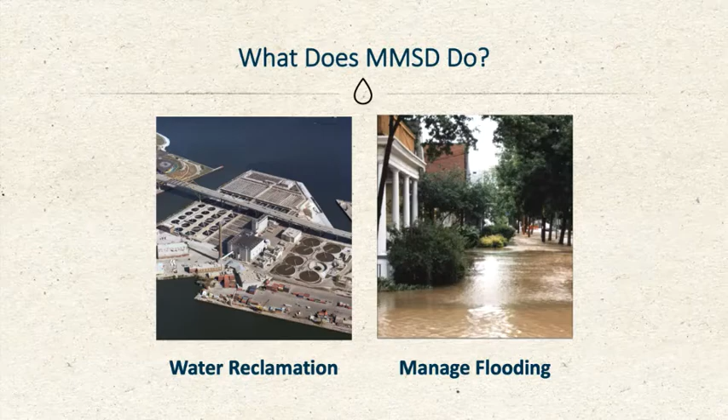The customers that we serve, over 1 million in the city of Milwaukee, as well as the surrounding community, 28 municipalities in total, and our planning area is about 500 square miles. And that includes 6 different watersheds.

All of those are not tributary to the Mississippi, so we are just a bit outside of this Mississippi River water basin. If you go about 20-30 miles to the west of us, you will actually get into the Waukesha area, and our flow starts to go down into the Fox and into the Rock River, out towards the Mississippi. But all of our water right here in Milwaukee drains directly into Lake Michigan, into the Great Lakes basin.

This is primarily through 3 main waterways that come through downtown Milwaukee. Again, this is the primary reason that Milwaukee is here, why the Native Americans settled in this area, and why the European settlers came in and

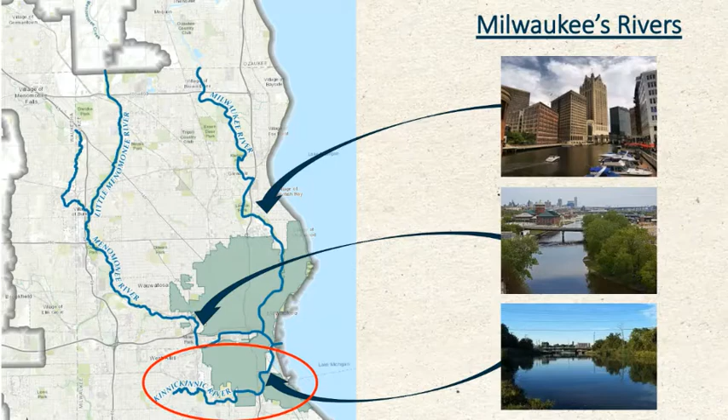And it is the most urbanized watershed. This is the Kinnickinnic River watershed, on the city south side. The top of the slide is the downtown area. It extends all the way down to the General Mitchell International Airport. It's only about 27 square miles, so it's relatively small, but also very urbanized. It's the most urbanized stream in the state of Wisconsin.

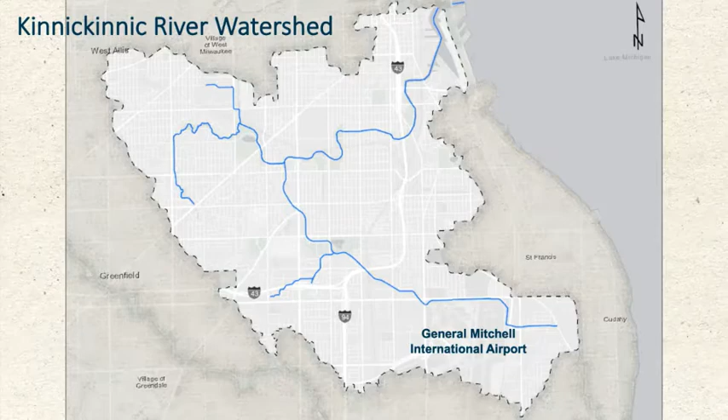Almost half of the surfaces within the watershed are impervious surfaces, which means parking lots, rooftops, sidewalks, streets, all those hard surfaces that don't allow water to soak into the ground. What this all translates into is rain running straight off of those surfaces and overwhelming our rivers and streams, which has led to a high flood risk throughout the waterways in this watershed. We've been working on this, but we still have over 660 structures, residential, commercial, industrial, located within this 100-year floodplain, within this high-risk floodplain.

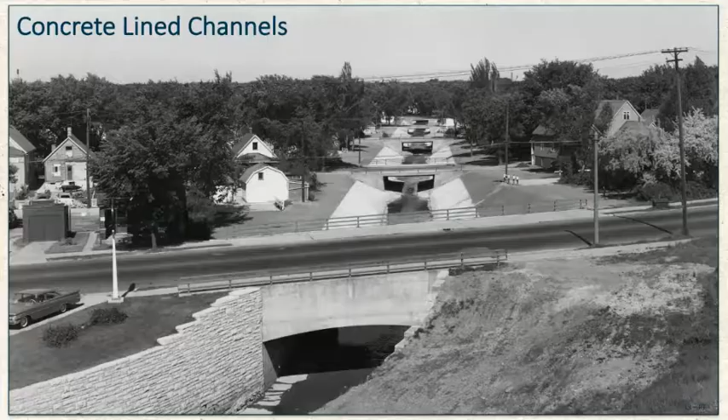In addition to this high flood risk, we have miles and miles of concrete lined stream. We have over 7 miles of this concrete lining throughout the watershed, throughout the Kinnickinnic River and its tributaries. And lots of people ask me, why do you have these open sewer drainage ditches that run through your communities here?

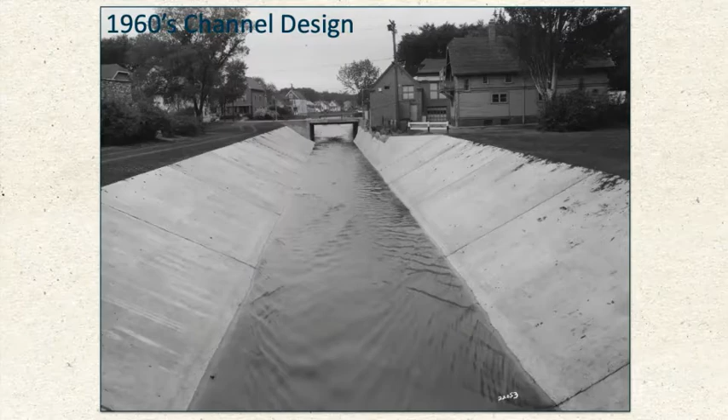How did you get to the point where you had these streams that were designed with the CCC and the WPA, still putting in some armoring, but having a natural stream design, and then converted it to this, which was the approach back in the day, used by flood managers back in the day.

It was all to address this historic flooding on the Kinnickinnic River, where you had development that occurred within the watershed, kept spreading out until it essentially was fully developed, and all these impervious surfaces led to significant downstream flooding in these areas. This is the old Polish neighborhood at the downstream end, at the bottom of the funnel, on the Kinnickinnic River.

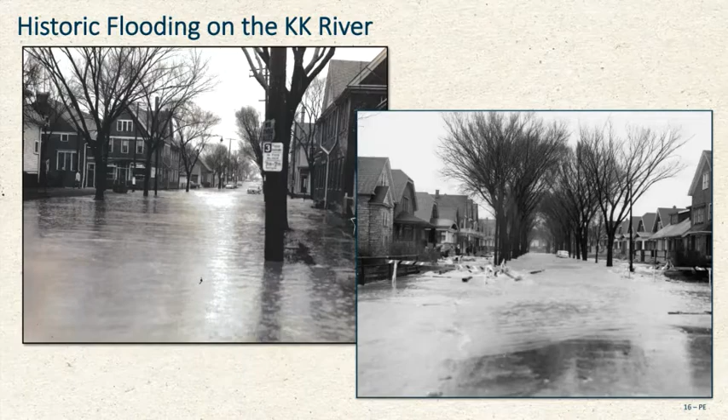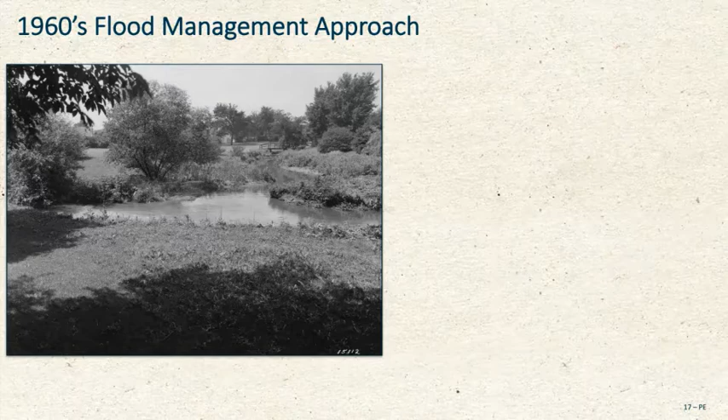And the way that they addressed that was to take these vegetated streams that were filled with all sorts of roughness and curvature, and they would straighten them out and line them with concrete. They would smooth out these channels, and really, this was the sewer engineer's design back in the day.

This was common back in the day, trying to push the water, move the water as quickly through these areas as possible. And it's good to keep in mind that this is also the time of the freeways, when the freeways were built, and this is all the same mindset, the same approach, just to try and move these things through these areas as quickly as possible, focusing on that single objective.

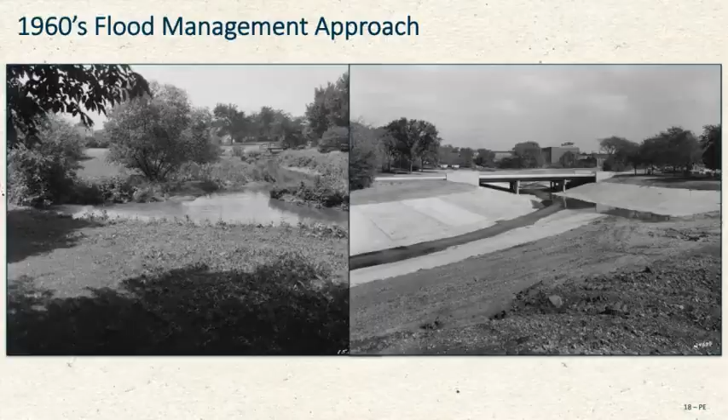They saw this as a big improvement. This was a major hurdle, and it probably solved some issues back in the day. But they all saw this as moving things forward, so they had big celebrations to celebrate all of this improvement throughout the area.

But we're left with this legacy, and we are now 50, 60 years after it's all been installed. We're seeing all sorts of problems from this. The whole intent of building these concrete lined channels was to move water as fast as possible.

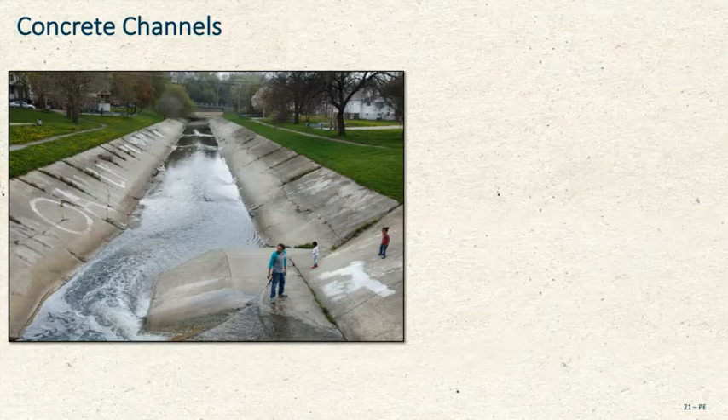These rivers and concrete lined channels run throughout the watershed, right through residential areas, right behind people's backyards, through neighborhoods where kids play and people come to see what's going on at the river. Right where this father is taking his two little girls down to check out the stream, this is what it looks like on a flooding day.

The river will fly through this area, doing exactly what it's designed to do, moving water up to 20 feet per second through this area. As a result, we've had several deaths over the years because when people slip into this area, they're not getting out.

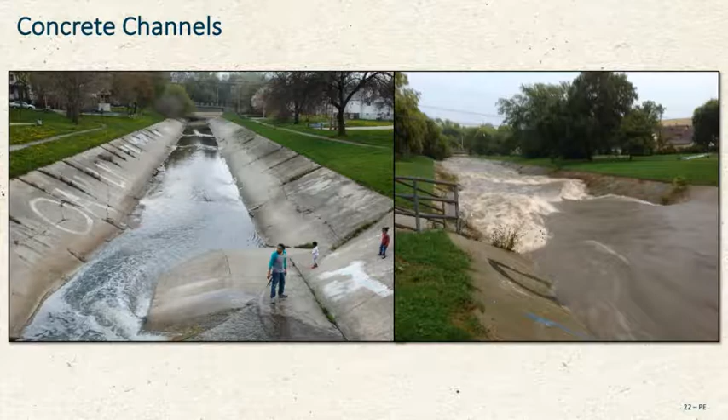So we had this severe public hazard running right through these neighborhoods. The obvious issue is that it's not a stream anymore, it's not a river, it's a concrete ditch. So you have issues with removing all the benefits, the habitat, and the water quality.

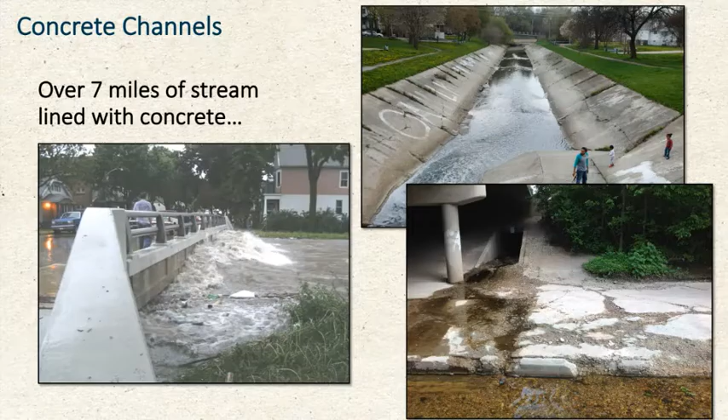So we are moving forward, addressing this flood risk issue along with all of this legacy concrete. MMSD, working with several area partners, tackled this watershed planning effort a few years back, trying to look at this holistically rather than just the sole objective of pushing water through these areas as quickly as possible.

We're trying not only to reduce the flood risk, but also to slow down these flows, improve the riparian and aquatic habitat, and restore some natural function back to these stream corridors so they look like streams again. This way the public can understand the connection between these streams and natural habitat, that they convey directly to Lake Michigan, and that they should do things to improve conditions around these stream areas.

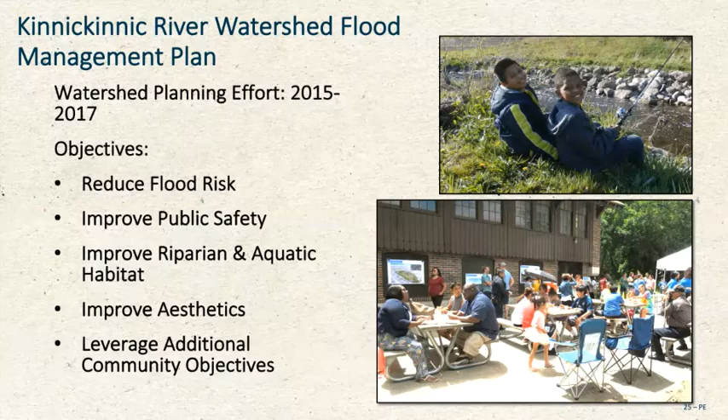So we tackled this watershed planning, and we did it using the standard toolkit that all flood managers are well aware of. We tried to break it down into more common language for the public, using terms like push it, slow it, and block it, instead of talking about increasing conveyance capacity, trying to simplify the message. But really, that's what we're talking about, increasing the opening so that water does not back up into these neighborhoods.

We understood that push it was overused in the past with these concrete lined streams, so we coupled that with slow it down too, by expanding these floodplain corridors. Blocking it, these levees and flood walls, that's everything you guys are well familiar with in the Mississippi area.

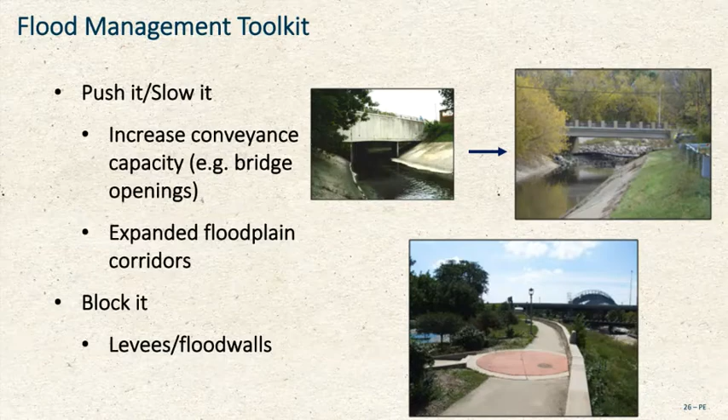Next slide. We also looked at storing the water through not only large scale detention basins, but also, because we're working within a small flashy watershed, what are the benefits of green infrastructure within this area? So smaller scale storage opportunities.

And then, when we're not able to lower the flood stages enough, when we're not able to bring that flood risk down, we look at working directly on these homes, either buying, acquiring, and removing them, or floodproofing them. In the Wisconsin area, according to the codes, that generally requires raising those homes and filling around them for residential. So it's a significant effort, one that's probably going to be pretty challenging in these dense urban areas in the Kinnickinnic River.

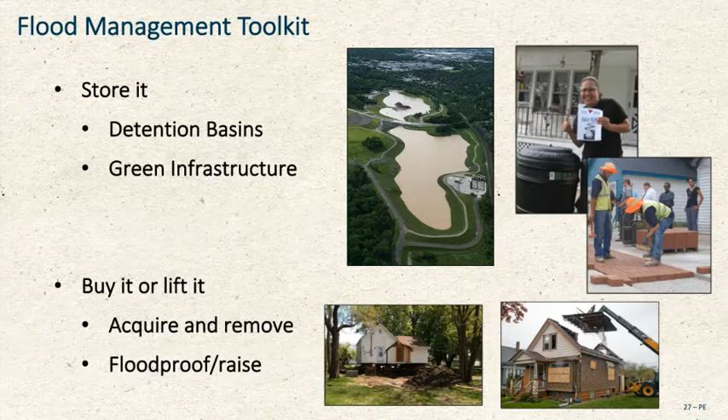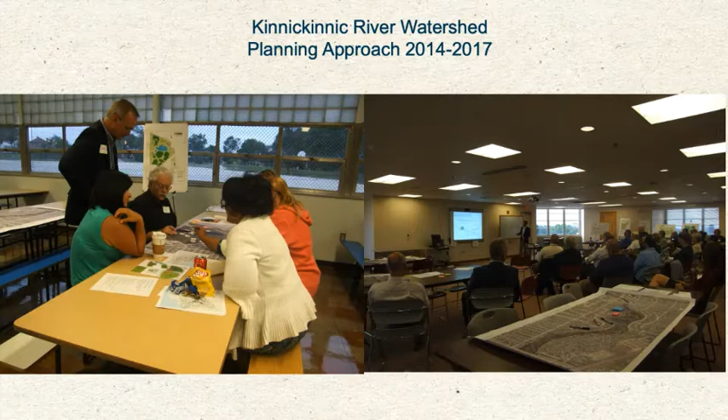In addition, we also worked with a lot of stakeholders in the watershed, including other organizations, agencies, and partners. A watershed advisory committee was established for the watershed far in advance of this specific project, focusing on anything happening with the KK River watershed. All of those meetings were absolutely critical as well, because there was a lot of knowledge there and a lot of projects and implementation happening.

So a lot of opportunities for coordination, no doubt. Here's just a quick snapshot, probably not perfectly exhaustive, of who is at the table at that level. All of that feedback and involvement from all these layers of community members and stakeholders resulted in a really rewarding process of planning the watershed.

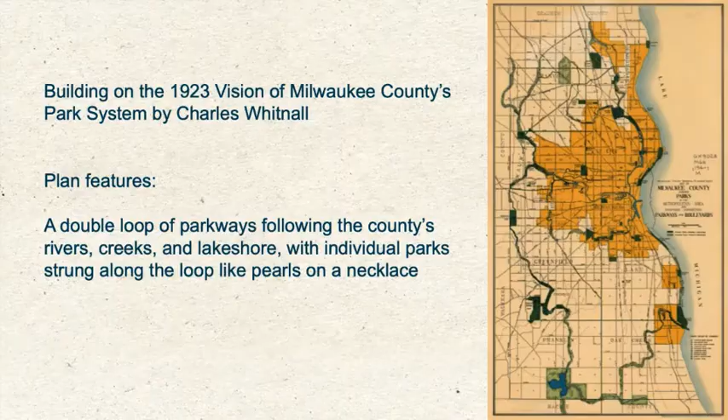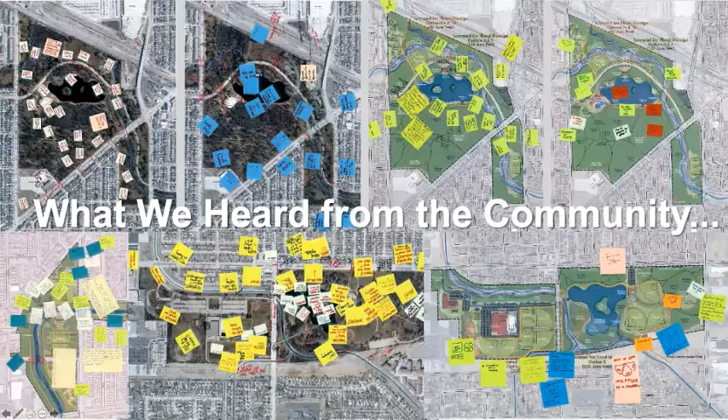Working with the community, we spent a lot of time listening from the beginning, looking at aerials and photos, and working with the community about what they'd like to see and retain. And of course getting to a level where we began to put together conceptual plans for that larger vision so the community could continue planning and continue that dialogue moving forward.

These are some examples of what we heard from the community. First and foremost was to make the KK River a community asset - wherever possible, naturalize it, daylight it, dechannelize it. The community wanted to see opportunities in the parks, but also elsewhere, to embrace the river and interact with it. Given we were doing park planning simultaneously, that gave us an opportunity to look in a larger way at the parks too, with the Parks Department, about what to retain.

These old growth trees were of utmost importance, as was increasing safety and habitat. Community gathering spaces and upgrading older athletic fields were also priorities. There's an existing trail system in the watershed that the community is interested in seeing grow naturally along the river and throughout the park system.

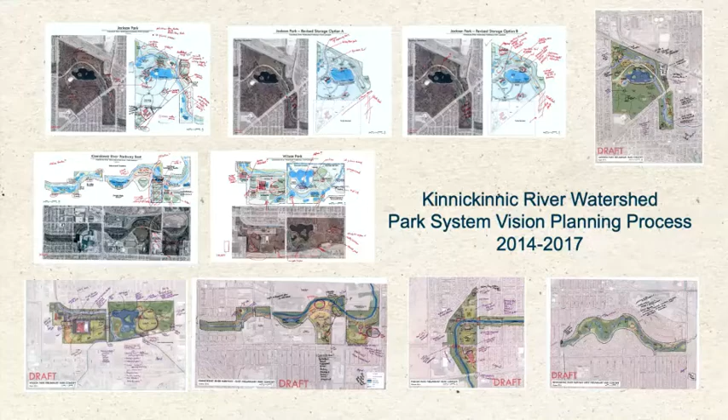There were alternatives for all of the parks, and the community had feedback there too. Milwaukee County Parks was at the table through and through, since ultimately these parks are their responsibility, and some of this feedback was going to be their financial responsibility as well. All of this culminated in these 5 master plans or concept plans, happening over a large span of time, 25 to 30 years or so.

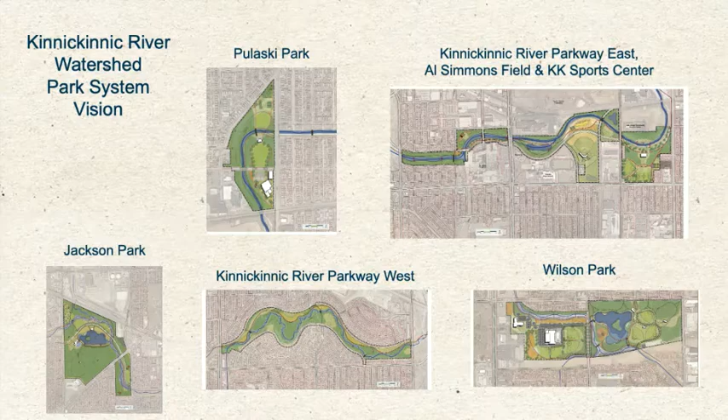So there's different phasing taking place. While some of these parks, like Wilson, aren't going to be updated anytime soon, it was critical for us to do in-depth planning now so we could better understand what's happening and what community members want, so that as planning continues, the community has already been engaged in that envisioning. Others, like Pulaski Park, are happening short term, and what you'll see shortly is it's now been built, which is exciting and has been critical in setting the tone for the watershed.

That's really an area where the community is incredibly active through this entire process. It's the densest area of the watershed, the most diverse, and in terms of environmental health and demographics, socioeconomically more disadvantaged than most other areas in the watershed. So it was of utmost importance to ensure this community is engaged and gets a park that is worthy of them.

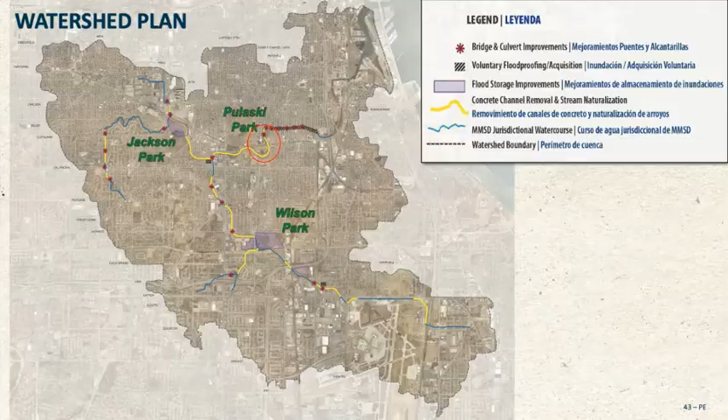For Pulaski, we did engagement a little differently, since it's a smaller scale area that's highly engaged and organized, already regularly meeting for community meetings and celebrations. This is a community that cares about one another and knows one another. 16th Street Community Health Centers and KK River Neighbors in Action would regularly plan events that we could plug our engagement into, rather than scheduling a special meeting. We could go with what made sense for them as well as the project.

This was really for the final design, picking out all the design details, the playground equipment, the pedestrian bridge. Working with county parks solidified what would work or not work for maintenance reasons, but there were still a lot of choices for the community to select those features for their own park.

Also really cool were activities like fishing demonstrations, even though there weren't fish in the KK yet. Kids fishing in a concrete channel is a little sad, but just for the kids to understand and learn that someday there will be fish in the KK River again was really cool and exciting.

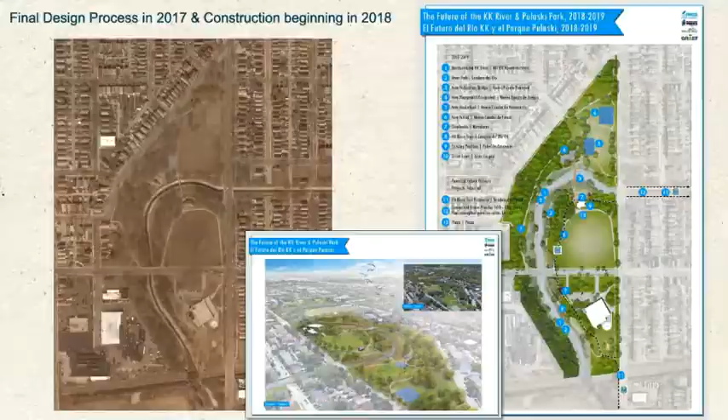Because the park, not the entirety but a good part of it, was going to be out of commission for a couple years during construction, it was of utmost importance for people to really see what was coming, and to know that even though they were losing their park for a couple years, all their hard work, feedback, and dedication was going to result in this really exciting project.

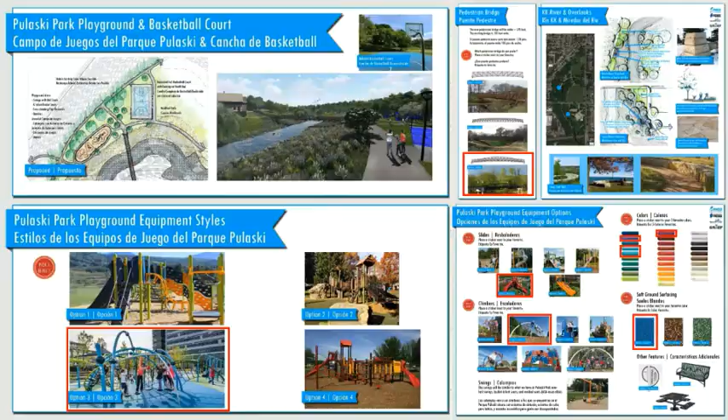We were really passionate about communicating that back to community members when they came to meetings, so they could understand why choices were made and what they picked, and how many people voted for what. I think that was really helpful to set the tone and make sure this project is catalytic for all the forthcoming projects in the watershed.

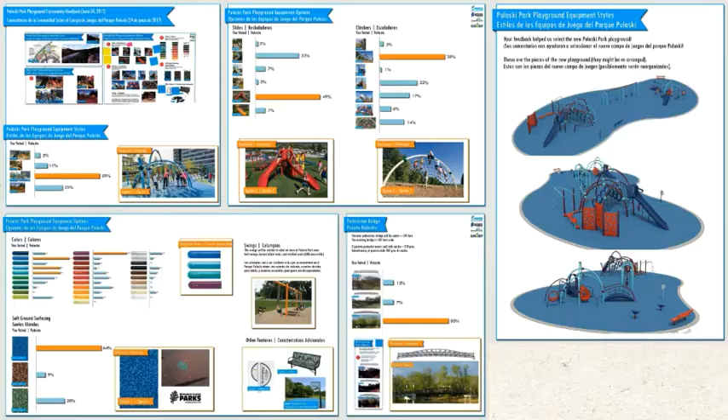With that, I'm going to turn it back to Patrick to share the story of the construction process. I just have a few more slides to go through. This is Pulaski Park, this is that broken concrete before we started in April of 2018.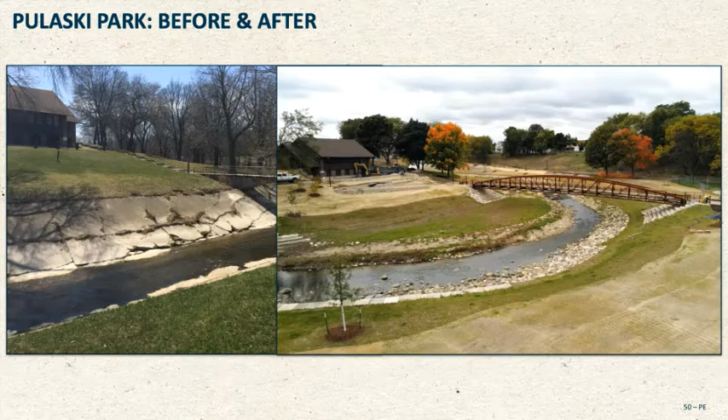As Tanya said, the design of that pedestrian bridge - you get to where you have 3 or 4 choices that the county, MMSD and others don't really care about, and you just say, let the community decide. So they got to choose that bridge, and that's their bridge, and they'll take care of it now. It's a great story, and you can definitely feel and hear the appreciation from the community.

Here's the concrete from the other side of that bridge, showing that concrete lining, and then removing that. Next slide.

That restored channel through this section. Again, this is right after construction, so the vegetation is still getting ready to grow, but we put in that rock-lined channel and have that vegetated floodplain to allow the floodwaters to expand in this area, with much slower flows passing through here during high flows.

We've already had a few high flows pass through, and they're definitely a lot slower within this section, much safer for active park users in this area. Next slide.

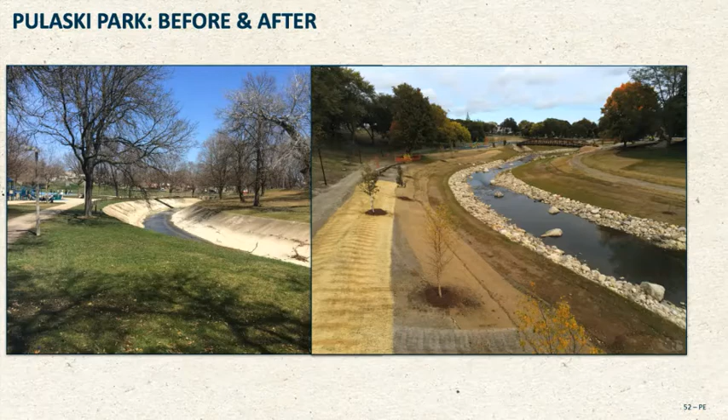These are some more updated photos. The other slides were more from last year, and we finished construction this past August. Some of these other areas that we completed a year ago have had a chance to start establishing - the vegetation's had a chance to start establishing and it's getting more use. The new playgrounds and new basketball courts that we had to shift outside of the alignment of the river are definitely active. Next slide.

You see the community use in this area - there's lots of smiles, and that's one of the most rewarding things. I don't live far from here, so I'm able to come pretty regularly and check on things, make sure everything's holding up the way it's supposed to. It's great to see the smiles on people's faces and how much they enjoy this park space, not only the active spaces, but also being able to get down to the river and enjoy the naturalized stream within this section.

It's really something that kids and the public don't have in this section of town. Bringing back nature within this highly dense urbanized area is so important to create that connection with the community. Next slide.

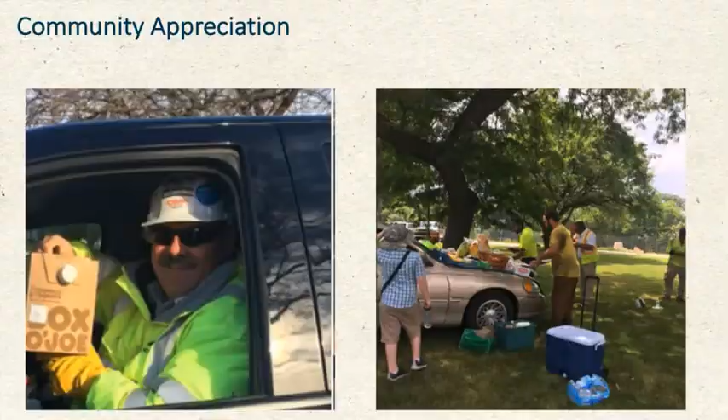So what's next? Just a couple slides here. We're focusing in on the watershed plan, focusing on the Kinnickinnic River. We've talked about Pulaski Park, and we're going to continue working in this area. Next slide.

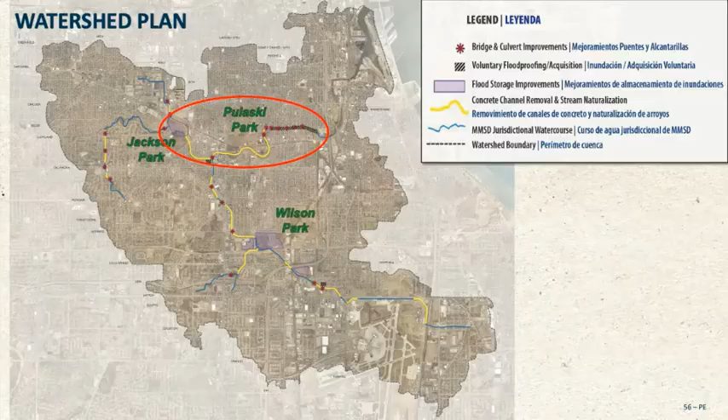And this is the flood risk within that section, from 6th Street all the way to 43rd Street. The river flows from left to right, and at the end that's the bottom of the funnel. It can't get through that area and spills out into the neighborhood. We have over 300 structures, homes and businesses, located in the floodplain along this section of the Kinnickinnic River.

We have a number of projects here. We've completed Pulaski Park, and we're going to be working on a larger park, Jackson Park, just starting preliminary engineering and design. That's probably going to be up to 3 times larger than Pulaski Park. We also have a section we call Reach 3 that we're working on with the Army Corps of Engineers. A feasibility study has been completed, and they've determined federal interest.

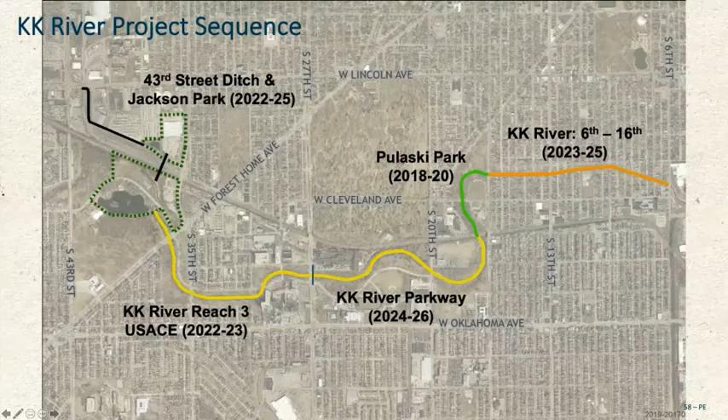So we're hoping to partner with them soon and start design and construction of that piece. But the last project I want to touch on is this section, 6th to 16th. This is the area with the greatest impact of flooding, where the flood risk spills out and inundates over 300 people. This area has been hit by flooding multiple times in the past 10 to 20 years, all due to not having enough room. This is the area that was first developed, and as the watershed was developed, the flood flows have overwhelmed it.

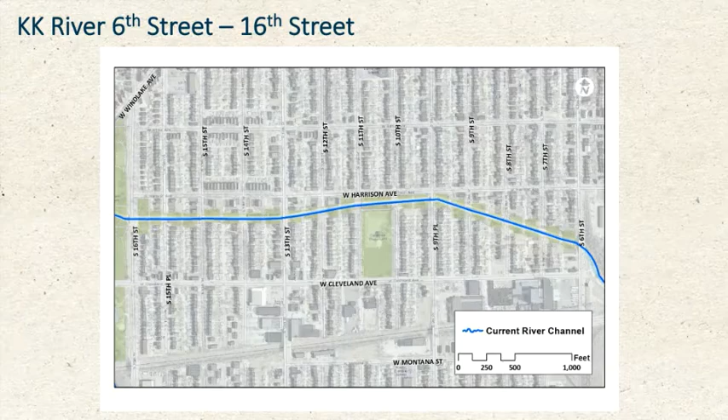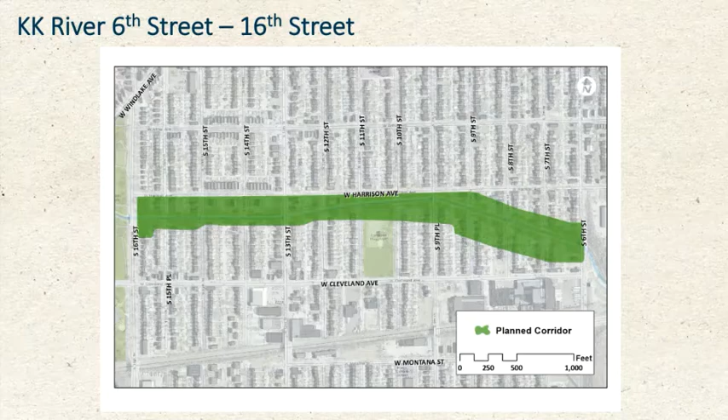So what we've determined is that even with all of this flood storage upstream, we have to expand this area. Right now we have a 50-foot concrete-lined cross section. We determined that we needed 200 feet in order to safely convey the flows through this area. And to get that space, we had to acquire a number of properties, including 83 homes.

We started this part of the project—we understood this recommendation a few years back before we even started the watershed work. We started that project back in 2009 and began the acquisitions. To date, we've acquired 79 of the 83 structures, all voluntary, and removed those structures. We have 4 structures left, there for a variety of reasons.

One is a landlord who just wants to stay as long as possible and make as much money as he can until he has to leave. A couple other people were underwater on their mortgage, so we're waiting until the absolute last date, and then we'll have to ask them to move, hopefully when they're in a better situation and able to keep them on their feet.

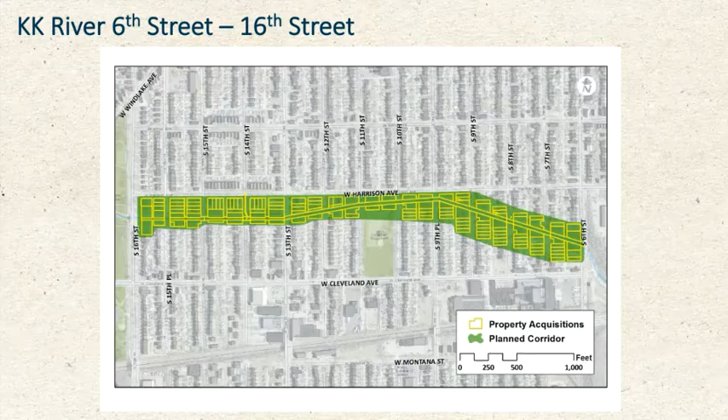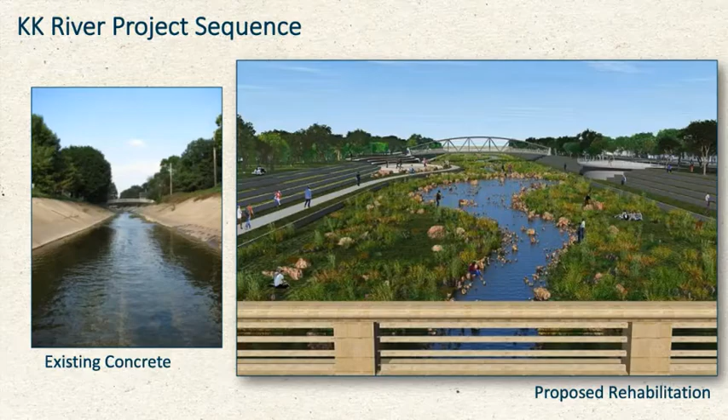In the next 5 years, we really hope to take off, investing another $100 million, where we'll reduce flood risk for over 250 structures in that floodplain—not physically removing those structures—and remove that concrete lining. By 2026, we're hoping to get it done before 2035. So the next 15 years, we want to have this project done, reduce flood risk to over 700 structures in total, and remove all of that legacy concrete lining. It'll come at a cost—it's a big price tag, and for the most part right now the investment is local, but we are looking for federal partners as we move forward.

So that, I think, is all we have. Hopefully you're still there, and the storms haven't blown you away—I hear there's some pretty nasty weather there.

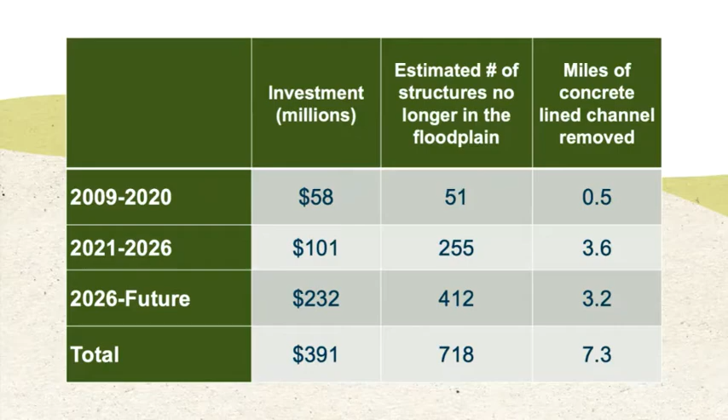Yeah, I mean, this project has had a couple of starts and stops. So we had one section of concrete that was only about 500 feet, and we also removed a bridge down at the far downstream end. That was back in 2010 through 2012. So we started this project. We understood that we had some significant issues, and it's complicated, but essentially we started the project, understood what we needed to do within this area, and we had that early out project that we were able to tackle.

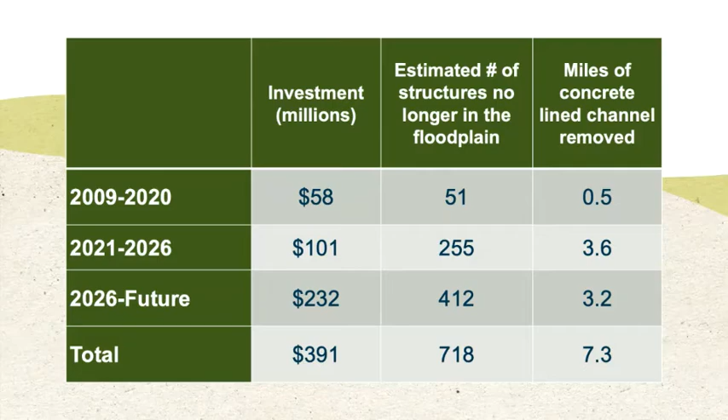But then as we're starting to move forward, working with the agencies, we realized that the floodplain flood flows that had been calculated had gone up to a certain period, up to 2004. And as we were moving forward with our project, we realized when you incorporate rainfall data from 2004 to even 2012, the flood flows started going up significantly. So we had to basically stop and restart, and went back to the watershed plan and really understood that we need to relook at this, because things have changed.

So it's something where we started the project with the buyouts. We knew we needed a wider corridor within that section, so we had started moving forward on that. We knew we needed a larger bridge, and we needed to remove the concrete at the downstream area. But then we had to take a step back and do the larger watershed project, and now we're ready to gear up again. And I guess just to touch on what...

It's a developed watershed, and so there's not a lot of room to build in a lot of freeboard. It's basically you got what you got, and we maxed that out pretty much as far as what's acceptable.

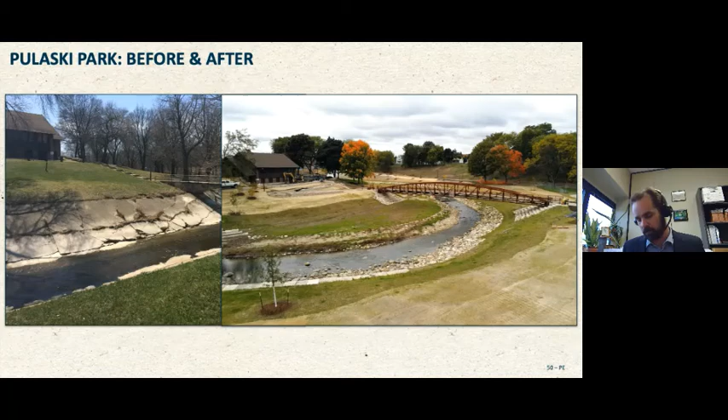I don't know if you could go to the map there, one of the maps real quick, Tanya, but in the far upper right-hand corner, that's where the downtown development occurred. And so if you kind of look at that, picture the development really occurring from that point and then spreading out through the watershed, just starting to go out to the far south and the far west.

And so over the years, that's how the development occurred. And so in that 6th to 16th section, where we're buying the homes near Pulaski Park, that's a section that developed in the 1880s and the 1890s. It was one of the earlier areas that developed.

And in 1910, we have some photos showing that they had some flooding back in the day, probably because my guess is that they had some of that marshy area, some of those wetlands that were upstream, were starting to get filled in with either farmlands or other things. And then even more so when they got paved over and turned into development.

But back in the day, in the 1910s, you had people that were built up very close to that stream, and there were complaints. There's documents showing that there was flooding back in the day.

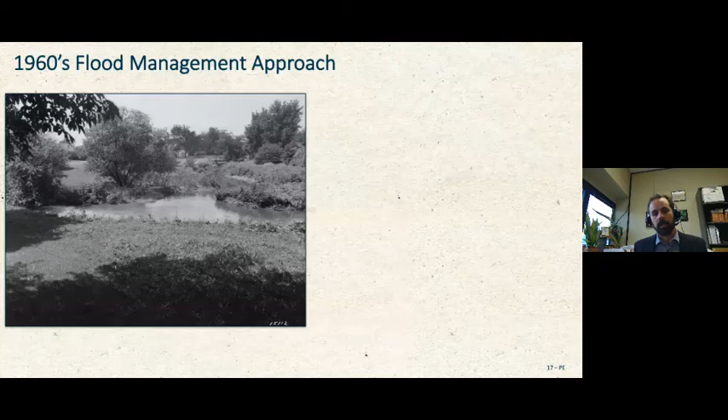That was something the CCC and the WPA, the Works Progress Administration, came in and put in that big rock to try and stabilize these areas, because they were starting to see erosion from these areas, the watershed changing. And so you had flooding that was taking place back in that day.

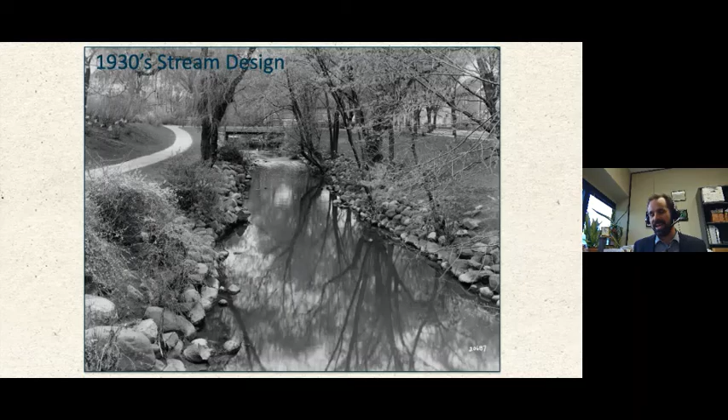You had talk in the late 30s, early 40s — they said, why don't we just put this stream underground? Why don't we just bury it and put it in a culvert? That had some legs, and fortunately it got thrown out.

But then after some significant flood events that hit in the late 50s in that community, in that area, that's when the concrete lining went in and was installed. And so you had the concrete that was put into place.

And we've had issues over the years with flooding, and the climate change that we're seeing in the intense rain events over the last 20 to 30 years is definitely ramping things up, so we are seeing higher flood events, more frequent flood events within this area. That's what our current statistics, our current calculations show.

We have pretty up-to-date data. It's still going to go up. We're not blind to that. We understand that, and we're trying to take measures that will address that. Our data in this area, I think it extends back from the 1940s. Our rainfall data used for modeling is from the 1940s through 2012, which is what we have within the modeling.

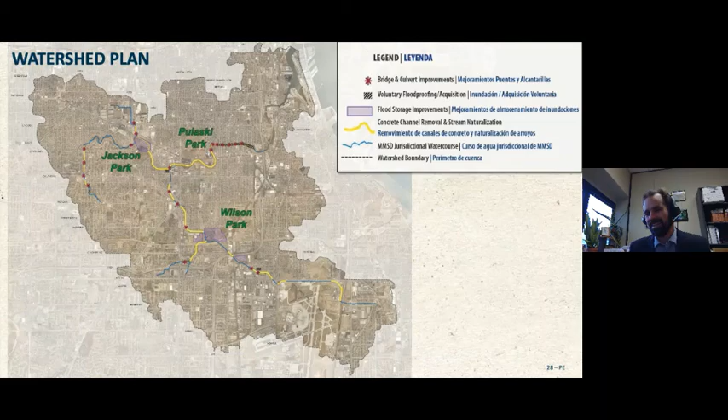No, we had a great time. Thank you for the opportunity to present this, Carol. Yeah, thanks so much. Yeah, thank you both.